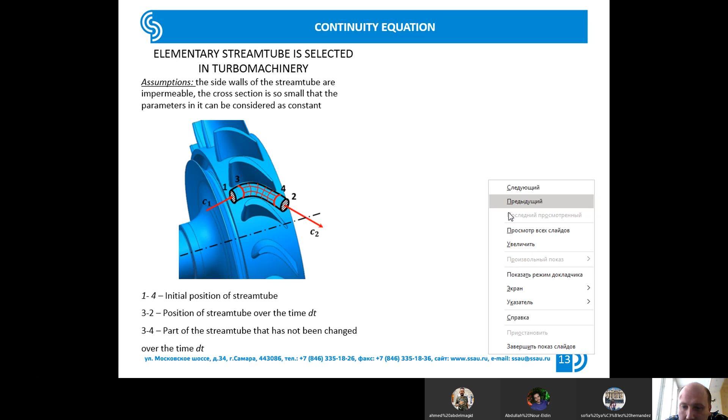And of course, we are not taking into account leakages and flow from the side. In other words, the flow comes into the tube through this section and comes out through this section. We have no additional flow supplied or extracted from the side. So, okay, let's study the flow through one small tube. At the first time period t0,

the tube was in position 1, 4. After a very small time period dt, which tends to 0, of course, the tube will be moved to position 3, 2. The time period dt is so small that the parameters between sections 1 and 3 and between 4 and 2 don't change. It's a very small time period.

So if we look carefully at this flow structure, we can find a very interesting point. The position 3, 4 doesn't change. So we can imagine that we have a worm, 3, 4. So let's draw a funny worm. At the first period, the worm takes the mass 1, 3 from the inlet position at time t0. It takes this volume inside, and at time t plus dt, it drops the volume 4, 2.

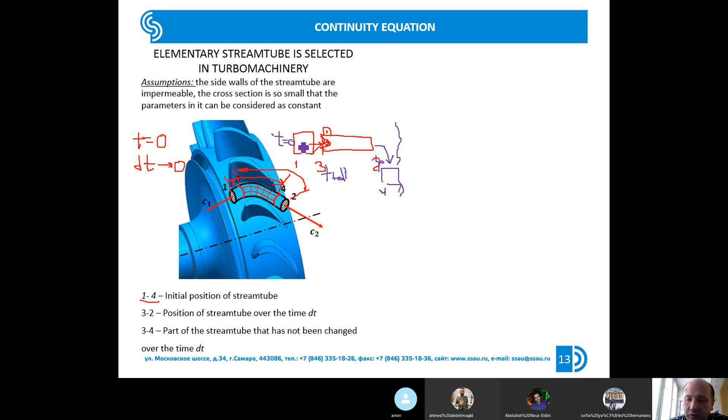That's why we can write that the mass of volume 1, 3 is equal to the mass of volume 4, 2. The mass which comes into the tube is equal to the mass which comes out of the tube. In other words, it's the mass conservation law. So let's erase this picture. Okay, let's calculate the mass.

Let's calculate the mass of the fluid which comes inside our small tube. How to calculate it? Very easy. Mass could be calculated like density multiplying to the volume of this mass. Density of the fluid multiplying to the volume of this mass.

About the density we already discussed, we know all parameters, that's why we know density. How to calculate volume?

Very easy. Volume could be calculated. In reality, it's the cylindrical volume. Volume could be calculated like height of the volume, let's use letter H, multiplying to the cross-section area, dF.

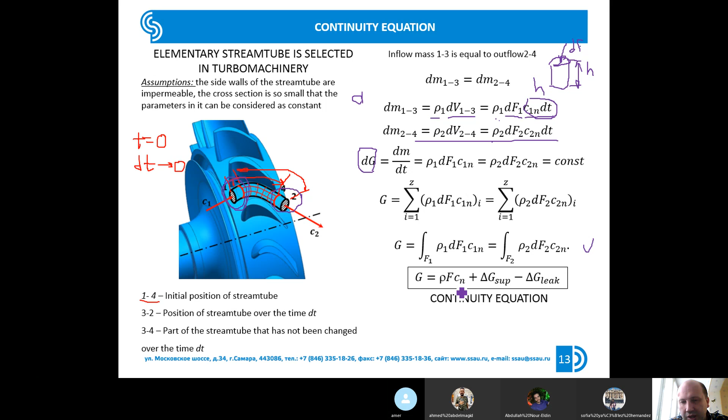In our equation, so after that we sum all our small tubes, we integrate our flow, and finally we receive such equation. Of course, if you make the integration, if you realize this equation, you find what the final equation will have only density, cross-section area, and velocity. But let's imagine what we could have supplying of additional mass or extracting some mass from our process.

That's why we need to add possible supplying or possible leakages of the flow from our channel. So, and finally we receive such equation which is called the continuity equation. It's really very important equation. It's really very widely used in different areas of industries.

Of course, you could not work with turbomachinery in the future. Of course, you could have no job in the area of the gas turbine engine. But if you will work as an engineer, you could use this equation in any range, in any industry.

For example, let's imagine you need to calculate the sizes of the tube which are supplying the room at which you are located right now, for designing of conditioning system. So you need to find, let's try to draw. You have the room, you are located inside, and you want to find what sizes the tubes must have which will supply the fresh air in your room. How to calculate it?

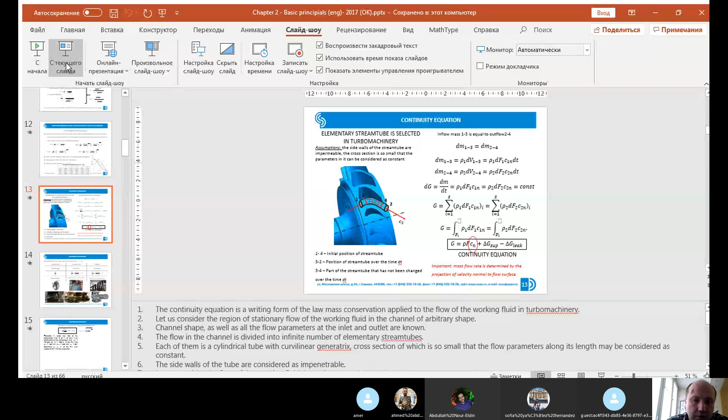Let's return back to the presentation. So do you see the presentation? Yes. Perfect, Sofia, perfect. So I will lost it.

So we are discussing the application of the continuity equation. I try to explain the example of using this equation in the industry. So, for example, you want to calculate the sizes of the tube which are supplying the fresh air to the room at which you are located. How to realize it? Using this equation.

So, you know the density of the atmospheric air. You could calculate mass flow rate because of special building requirements which say, for example, what in education rooms the fresh air must be replaced not less than 8 times per hour. That's why if you know the volume, if you know density, you could calculate the minimum mass flow rate.

Which need to provide your conditioning system. And after that, you choose this velocity. This velocity is chosen from experience. For example, if we are speaking about the conditioning system, this velocity must be lower than 4 meters per second.

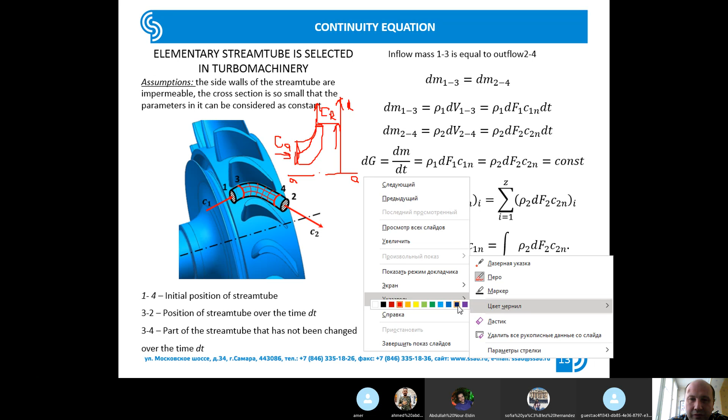If we speak about the centripetal turbine, we have the opposite direction of flow. In the centripetal turbine, the air comes in at the upper radius in the radial direction, and comes out in the axial direction at the lower radius. So in this case we have the opposite picture relative to the centrifugal compressor. In the inlet section, the radial projection of velocity will determine the mass flow rate, and at the outlet, mass flow rate will be determined by the axial projection.

So I think that's all about this slide. This information, I hope you have already studied with Professor Dima Uglanov.

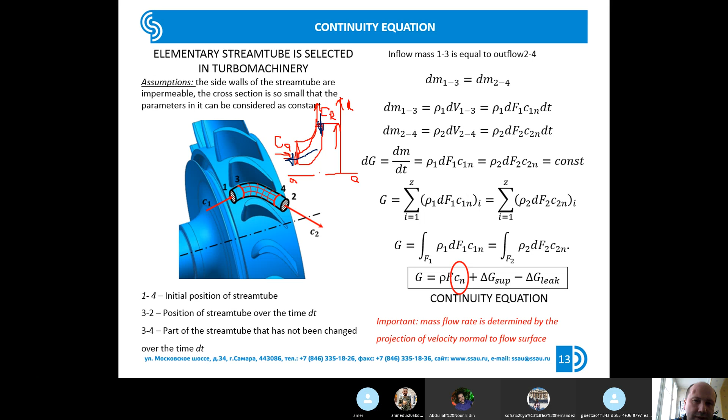I hope you remember it, and I hope you understand it. I refresh this information for you because it's really important - it's very widely used in real engineering practice in many industries. But of course, for us, it's much more interesting to apply this equation to turbomachinery.

So let's apply this equation to the turbomachinery. Let's imagine we have some turbomachinery. At this moment, it's not important what kind of turbomachinery. We have some flow that comes in, we have some flow which comes out. Let's write the continuity equation for the turbomachinery: mass flow rate through the first section equals the mass flow rate through the second section.

And we could write that the mass flow rate through the first section is the density multiplied by the normal velocity at this first section and multiplied by the cross-section area F1. And this mass flow rate equals the multiplication of parameters at the outlet of the turbomachinery.

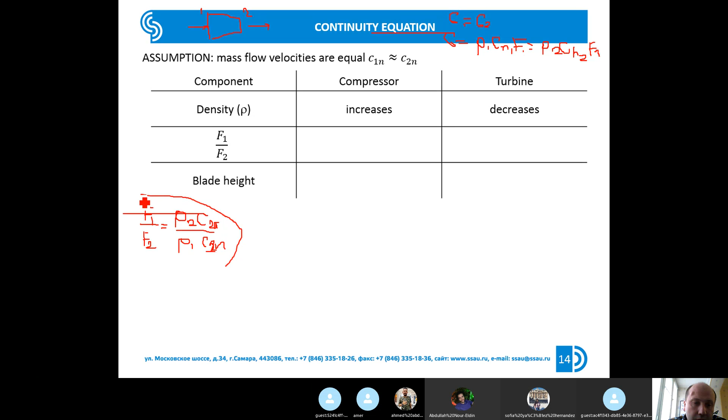Let's study this equation and apply it to the turbomachinery flow. Before we start, we will make the assumption that the normal velocity is approximately equal at the inlet and at the outlet. It means we could avoid these two elements from our equation.

Of course, you could say in real turbomachinery the normal projection of the velocity could not be equal. But in reality, it's typical design and practice that the normal velocity at the inlet and at the outlet of the stage of the turbomachinery will be taken equal. It's really typical design and practice.

It's the first case. And at the second case, you see that the mass flow rate is influenced by density and velocity. If we speak about the compressor, for example, in a typical axial multi-stage compressor of the gas turbine engine, the velocity usually changes approximately 20% along the multi-stage compressor. But density could change 4-5 times.

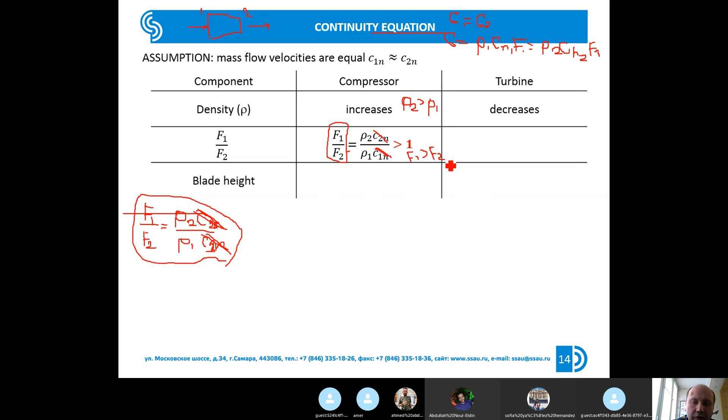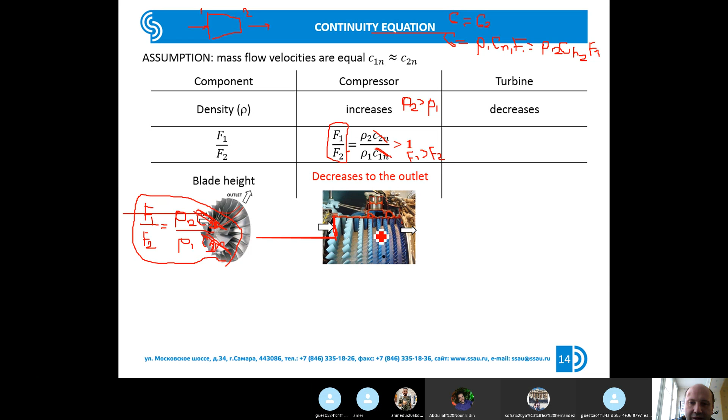So here you see a typical high pressure compressor. This is the high pressure compressor of the Rolls-Royce Pegasus engine. You see high blade height at the inlet and small blade height at the outlet.

It's not clearly seen, let's remove that. So you see the same in the centrifugal compressor. At the inlet you have high blades, at the outlet you have small blades.

So using the continuity equation, we can explain why the blade heights in compressors must be reduced from inlet to outlet. The main reason for reducing the blade height is increasing density. Because you are increasing density, your mass of fluid comes to occupy a smaller volume. And to avoid losses, to avoid reducing pressure, you need to reduce the cross-section area, and you need to reduce blade height.

So, in my opinion, it's a very interesting conclusion because it explains why the compressor looks like we know it. You see the typical compressor and you see that the blade heights are reduced from inlet to outlet. So now we have explained why this happens. In my opinion, it's very interesting.

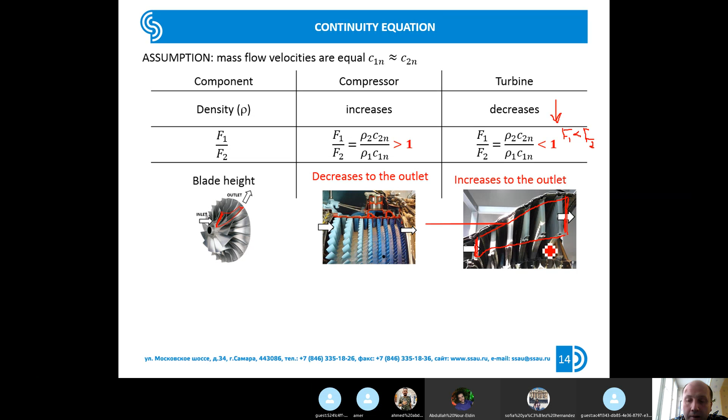So here you see the example of the flow path of the low pressure turbine. You see at the inlet small blades, at the outlet high blades, and the blade heights in this turbine increase from inlet to outlet. In my opinion, it's a very interesting conclusion because it explains why the turbine looks like we know.

And if you look at the different types of gas turbine engine, for example, here a simple turbojet engine, here a turbofan engine, here a small engine with centrifugal compressor, in any case, you will see the same picture. In the compressor, at the inlet, you have long blades. At the outlet, you have short blades. Here, the same: long blades, and small blades at the outlet of the compressor.

In the turbine, the opposite picture. Small blades at the inlet, long blades at the outlet. And at this turbine, the same. Very small blades here, very long blades here. So these conclusions are common for all types of engines, for all types of turbomachinery, and I think it's very interesting because this equation explains why the compressor and the turbine look like we know.

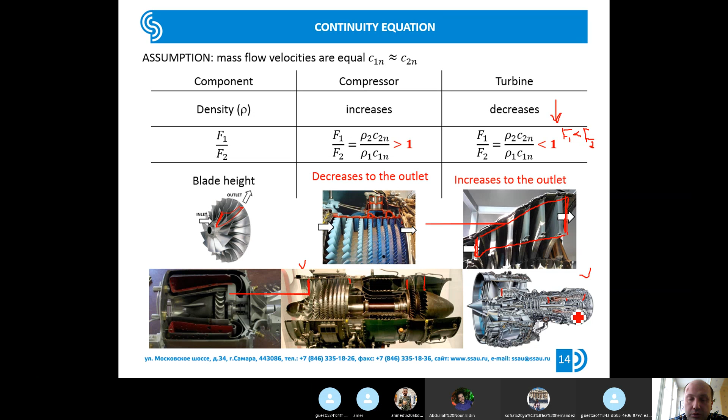So I think that's all about the application of the continuity equation. I hope you remember the classical shape of the continuity equation: the mass flow rate equals the density times the normal velocity times the cross-section area. But using this equation is not convenient because you need to know the density.

But I hope you remember that the density could be calculated using the Mendeleev-Clapeyron equation like this, and you see in this equation, here pressure, here density. For calculating the density, you need to know static temperature and static pressure. Usually we don't know this information. Typically from the test, from the thermodynamic calculation, we know total parameters.

I refresh the information from the previous lectures that we use the top star to designate total parameters. So typically, we know total parameters from the thermodynamic calculation and from the tests. But for calculating the density, we need to know static parameters, and we don't know them. That's why, using the gas dynamic function and the Mendeleev-Clapeyron equation, we could transform this equation to such a shape.

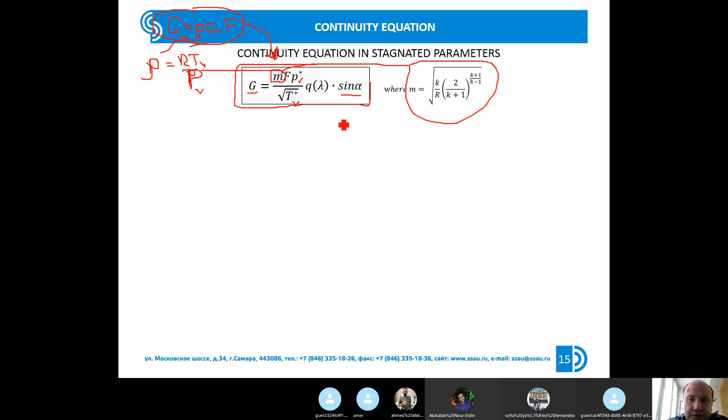These equations are very widely used in real practice. For example, I could show you some examples of using this equation. Example number one. You have the compressor, and you know all parameters at the inlet. You know total pressure, this one. You know total temperature in the inlet section, this one. You know mass flow rate through the inlet. You know hub diameter, this one. You know shroud diameter. What else? You know alpha, 90 degrees, this one.

And you need to find the static parameters at the inlet of this compressor. How to calculate it? Very easy. We need to use the continuity equation. So let's erase a little bit.

We don't know only two things in this equation. We don't know the cross-section area, and we don't know q(lambda). Could we find the cross-section area? Yes, of course. We know the inlet, and we know the hub and shroud diameters of the inlet section. That's why we can calculate the area of the inlet cross-section this way.

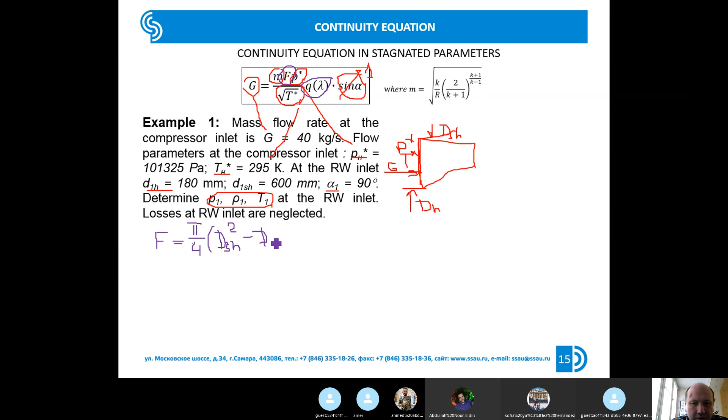Pi, 3.14, divided by 4, times D shroud squared minus D hub squared. So this way we find the cross-section area. And if we look carefully at this equation, we don't know only q(lambda). We extract q(lambda) from the continuity equation.

And finally, based on the parameters we already know, we calculate q(lambda). What does it give us? If we know q(lambda), a gas dynamic function, you can find, using equations or tables, the values of pi(lambda) and tau(lambda). Let's find these values.

Let me remind you: pi(lambda) is the static pressure divided by the total pressure. Tau(lambda) is the static temperature divided by the total temperature. And based on these equations, we can find static parameters. P1 equals pi(lambda) multiplied by P1 total, and the same equation for the temperature.

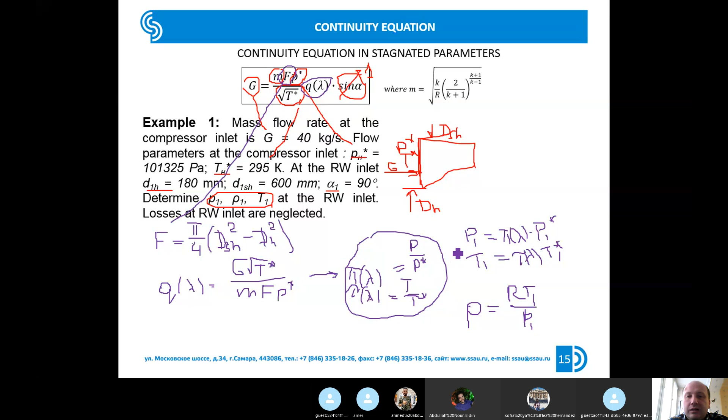About the density, very easy, we will use the Mendeleev-Clapeyron equation. Like this. So the task is complete, and we found static pressure, static temperature, and density.

The second example is much easier. It goes approximately the same way as the previous case. We have the compressor, and for the inlet section we know the hub diameter, the shroud diameter, total pressure, total temperature, velocity, and that's all. And we know the direction is normal to the inlet section, which means alpha 1 equals 90 degrees. Our aim is to calculate the mass flow rate.

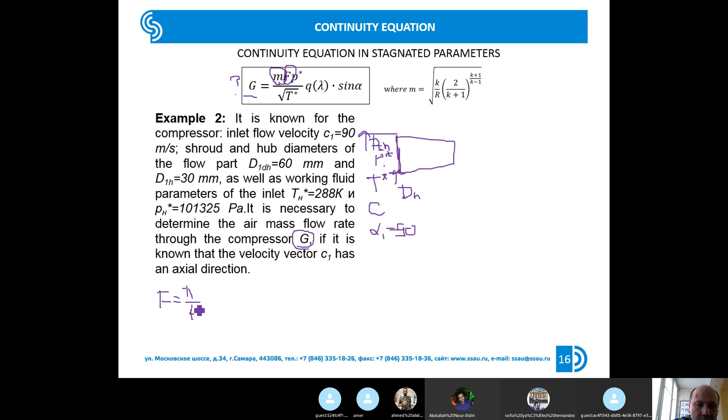Of course, we have the continuity equation which can help us find the mass flow rate. Let's look carefully at this equation. We need to calculate mass flow rate, and we will not change this equation. So m, we know the value of m, it depends on the properties of the fluid. The cross-section area F we will calculate like in the previous case, as the area of an annular channel: D shroud squared minus D hub squared.

Pressure, we know it, this one. Temperature, we know it, this one. Sine alpha equals 1 because alpha 1 equals 90 degrees, and we don't know q(lambda). How to calculate it? We need to calculate lambda based on the velocity: C1 divided by the root of 2K over K plus 1, gas constant, and total temperature. Based on this equation you calculate lambda, and then using the gas dynamic function you find q(lambda). Then put q(lambda) into this equation and calculate the mass flow rate.

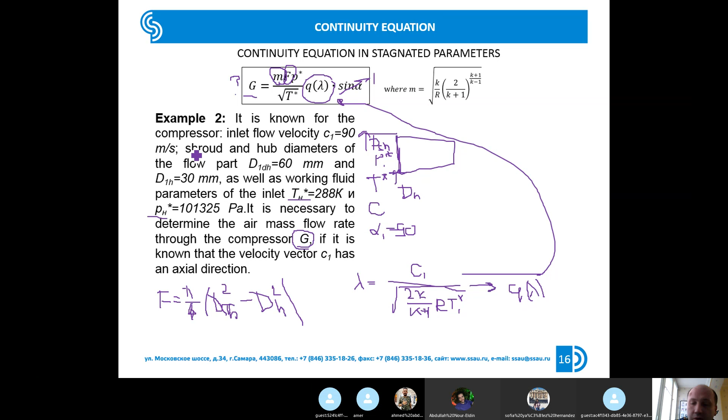So you see it's a very typical example, and this equation has very wide application. You can imagine a lot of tasks. For example, in one task you need to calculate mass flow rate. In the second task you need to calculate sizes. In another task you need to calculate velocity and other parameters. That's why these equations are very useful for calculating turbomachinery.

So let's skip example number 3. It's approximately the same as the previous two, but it's rather big, and it's not convenient for me to write formulas using the mouse, so let's skip it. So guys, that's all about the continuity equation.

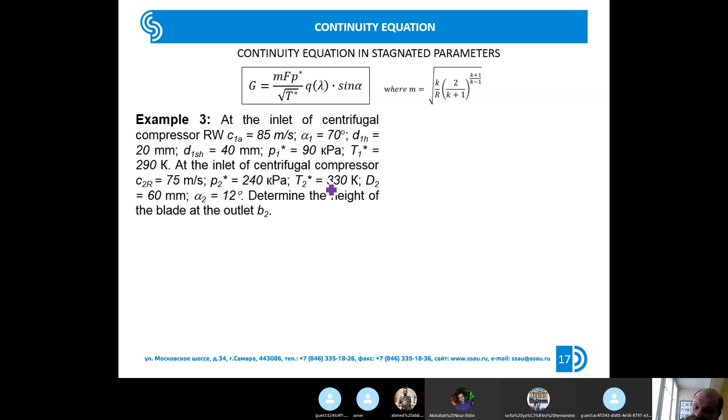And let's discuss the energy equation. In turbomachinery theory, we will use 4 energy equations: the energy equation in mechanical form, in absolute motion and in relative motion, and the energy equation in heat form, in absolute and relative motion.

We will study 4 energy equations. Most of these equations you already studied in gas dynamics courses, or maybe in physics courses. I'll refresh how to derive these equations, and of course it will be more interesting for us to apply them to turbomachinery and find some conclusions which will help us better understand the working process of turbomachinery.

So today we will discuss the first energy equation: the energy equation in mechanical form in absolute motion. In other words, this equation is called the Bernoulli equation, and I hope you know this name and have already studied this equation.

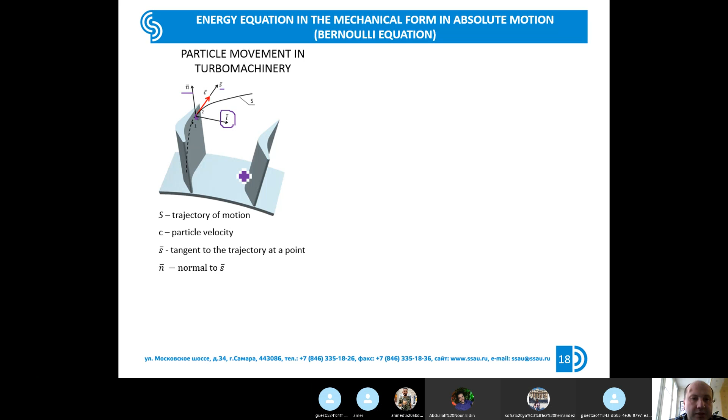So let's take some space around particle 0, and this space will have the shape of a brick. The size is dl, dn, and ds. Of course, you could calculate the mass of this brick as the volume multiplied by the density, and the volume you could calculate as dl multiplied by dn multiplied by ds.

So we extract this brick around point 0. And to keep this brick in equilibrium, let's replace the action of the environment by the action of some forces. What kinds of forces act on this brick? Three kinds of forces. First, it's the pressure forces.

Let's look carefully at this brick. We have six walls of this brick, and let's take this wall. The size is dn dl, and we will have the action of the pressure P on this side. How to calculate the force from the pressure P? Very easy. You need to take the pressure and multiply it by the area of the side on which the pressure acts. That means dn multiplied by dl.

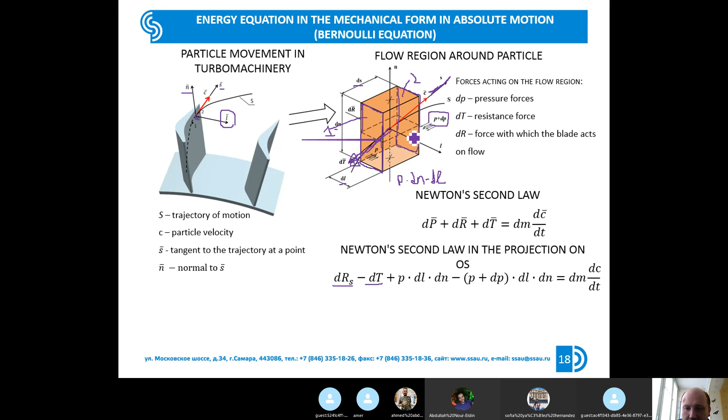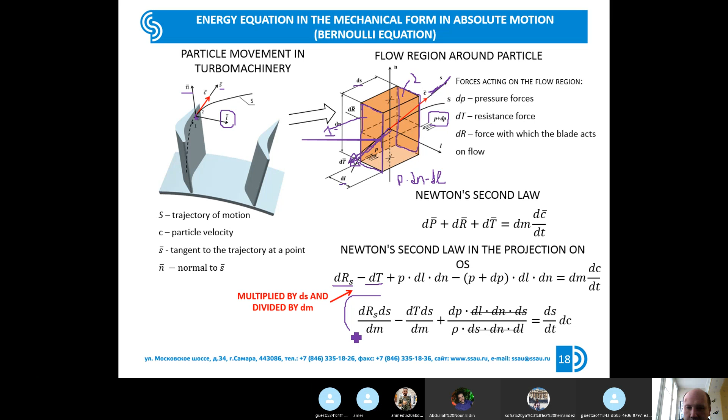So we multiply all parts of this equation by ds and divide by dm, and you see that some elements could be removed. So let's analyze this equation which we received. What do we have? The first term is the force from the blades multiplied by ds, by the distance. Force multiplied by distance is energy, it's work, it's mechanical work.

That's why in the top part of the first term we have mechanical work, and after that we divide by the mass. In other words, we receive the specific mechanical work which is supplied from the blades to the flow.

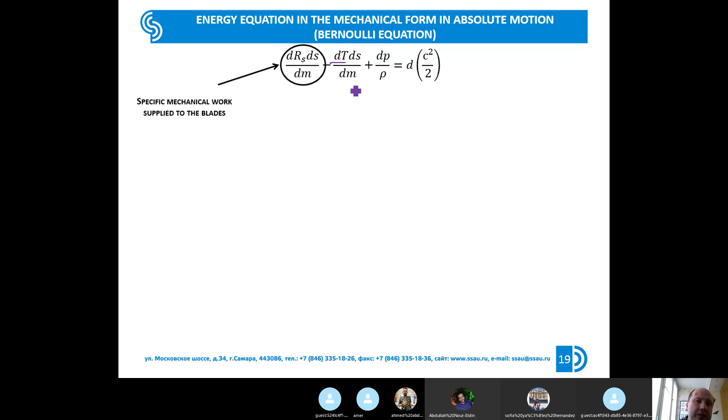The second term looks like the first one, because we have the force. We are multiplying it by the distance, so we receive work. We divide work by the mass, so that's why we receive specific work. But in this case, it will be specific work for overcoming losses.

The third term is the work of the change in pressure. It's the energy which we need to spend during the compression process or which we receive during the expansion process. And the last term, I hope you understand it, you have known it a long time from physics courses. It's the change of the kinetic energy.

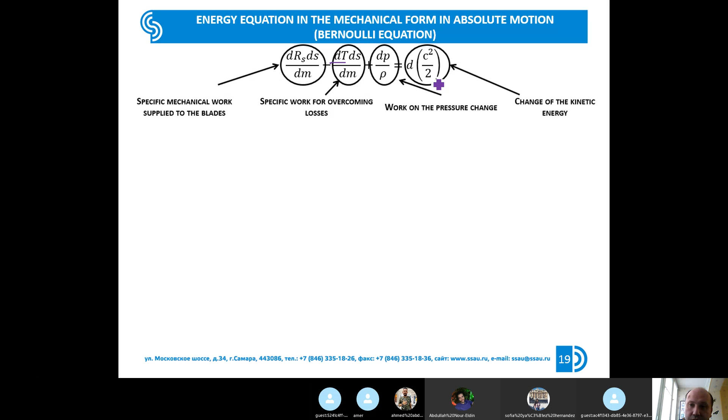So, finally, after some transformations, we receive this equation, and this equation is the classic energy equation in mechanical form in absolute motion. In other words, this equation has the name Bernoulli. This is the Bernoulli equation.

Maybe you have seen another shape of this equation, because sometimes this equation includes the energy of gravity forces. But in turbomachinery, in gas turbine engines, gravity forces are usually very small, that's why we will not take them into account. So finally we receive the energy equation in mechanical form in absolute motion, and this equation could be called the Bernoulli equation.

Let's apply this equation to the compressor. Before we write this equation for the compressor, let's remember how the compressor works. We are supplying some mechanical work to the compressor. We begin to rotate the rotor of the compressor, and the compressor begins to create increasing pressure. That's why, based on this information, we could write the Bernoulli equation for the compressor, and it will look like the classical shape of this equation.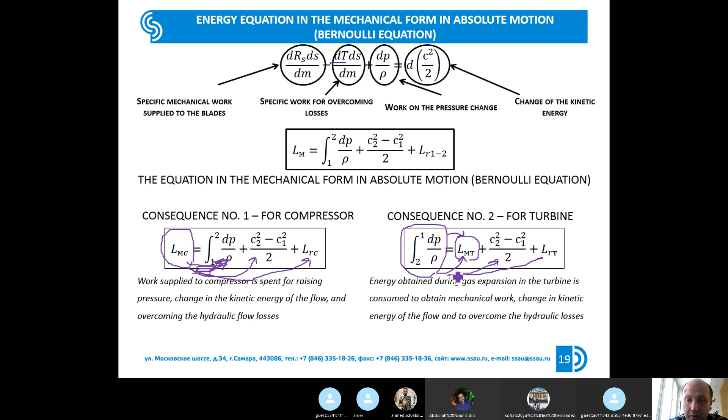It's a very important conclusion because it explains how the total parameters, total pressures, will be changed. If we look carefully at this equation, we will see that the total pressure will be changed only in the case when you are supplying or extracting mechanical energy. In the case that you are not supplying mechanical energy, total pressure must be constant.

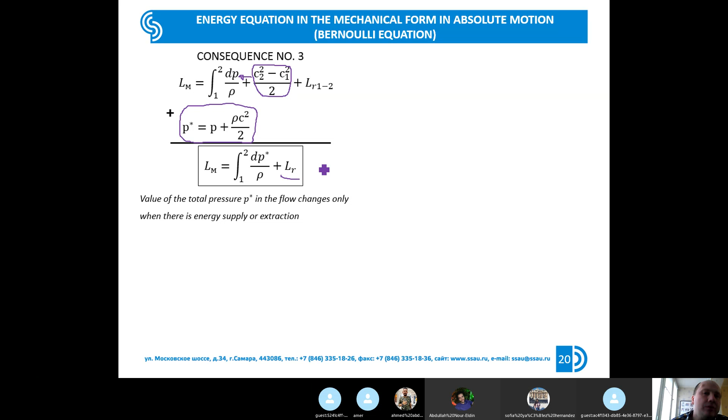But because we have losses in this formula, in reality, when you are not supplying mechanical energy, total pressure will drop a little bit because you have losses. In other words, in the ideal case, if you are not supplying mechanical work, if you don't have moving elements inside your channels, the total pressure must be constant. But in reality, of course, we have losses. That's why total pressure in non-moving channels will drop a little bit.

These physical principles are used to estimate losses in non-moving elements, such as intakes, nozzle blades, guide vanes, combustion chambers, nozzles, tubes, and other elements. If your channel has no moving elements, no mechanical energy supply, the total pressure must be constant in your channel. But of course, in reality, it drops a little because you have losses, and the reduction of the total pressure could be used for the measurement of the losses in non-moving channels.

For these cases, we use a physical value called the total pressure recovery coefficient, and it's equal to the total pressure at the outlet of the channel divided by the total pressure at the inlet of the channel. In the ideal case, sigma, the total pressure recovery coefficient, equals 1. If you have huge losses, this value tends to zero. But of course, in reality, we need to create channels with minimum losses, and the total pressure coefficient must tend to one.

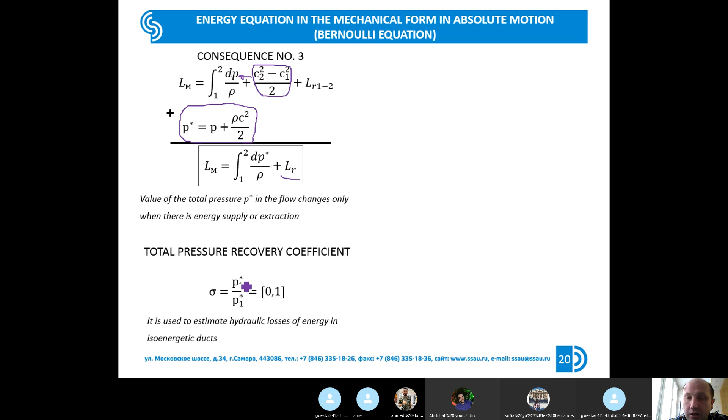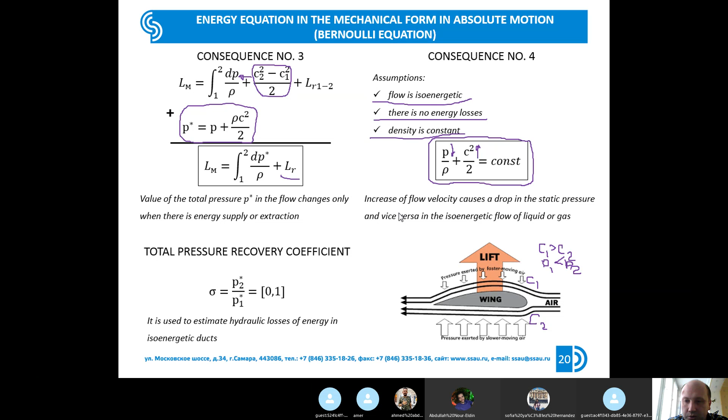So guys, that's all I want to say about the Bernoulli equation. I think our time is close to the end. So, do you have any questions?